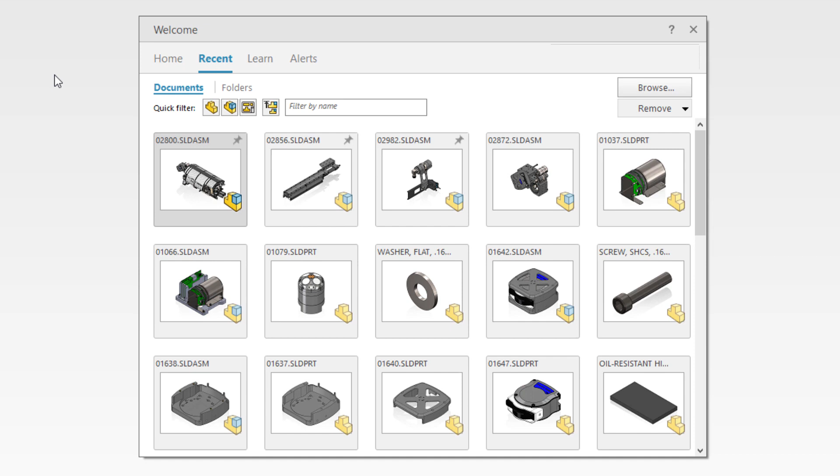You demand the best performing tools so you can work as efficiently as possible. SOLIDWORKS 2021 delivers multiple new enhancements to access your data faster and work more efficiently. Open times for both resolved and lightweight assemblies have been improved in SOLIDWORKS 2021.

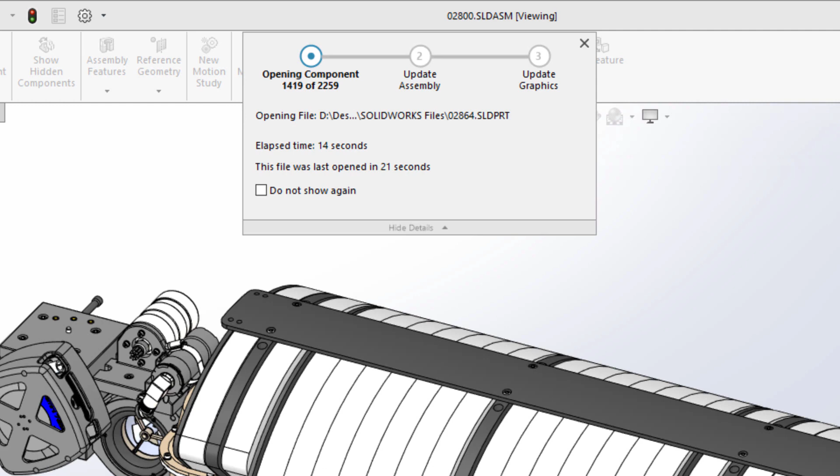This 2259 component assembly opens in only 21 seconds, making getting into your designs faster than ever. The larger the assembly, the greater the gains you will see while opening them in lightweight mode.

To improve working with lightweight components, there is now also a more streamlined approach to accessing their assembly and feature information. Simply expanding a component from the Feature Manager tree will now dynamically load those components on demand, giving you access to the fully resolved subassembly or part.

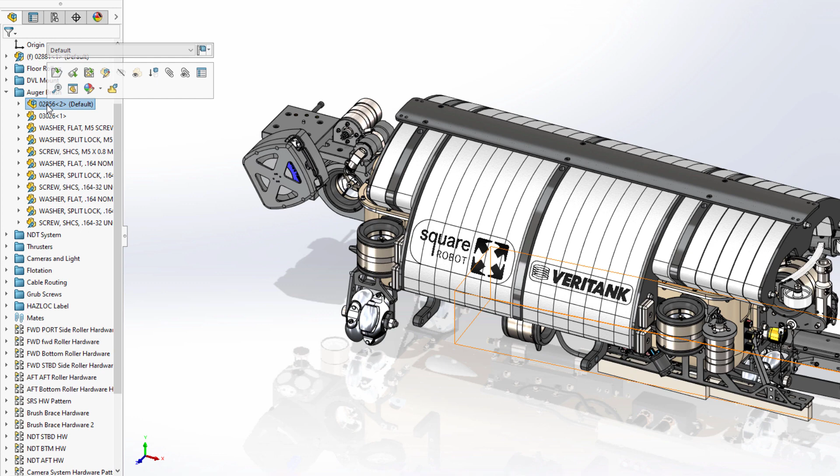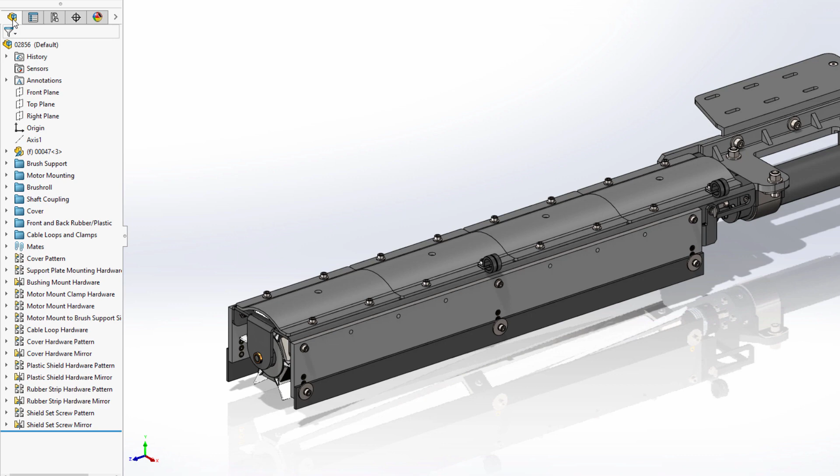This prevents unnecessary loading of large assemblies, but also allows you to quickly access and resolve the components you're working on as needed. Working with configurations in SOLIDWORKS 2021 is now also faster. Both switching between and creating new configurations are now significantly faster for assemblies.

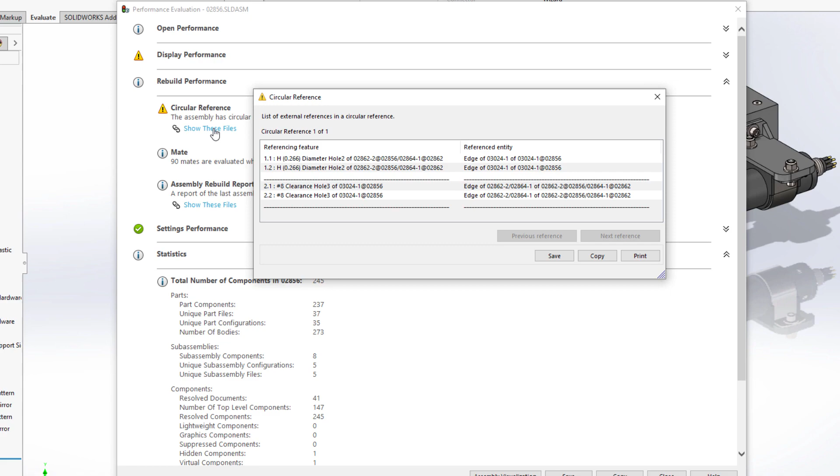The performance evaluation tool within SOLIDWORKS has always been an invaluable resource to give insight into areas of a design that may cause performance degradation. New for SOLIDWORKS 2021 is the analysis and reporting of circular references within an assembly. In this case, two holes on two separate parts have been found to reference one another.

You can use this information to further investigate the design and determine how they're referencing one another to fix these issues. In this scenario, one of the components listed in the report contains a hole wizard feature, where its location sketch has center points that are referencing the edges of a hole in the adjacent part to locate them concentrically.

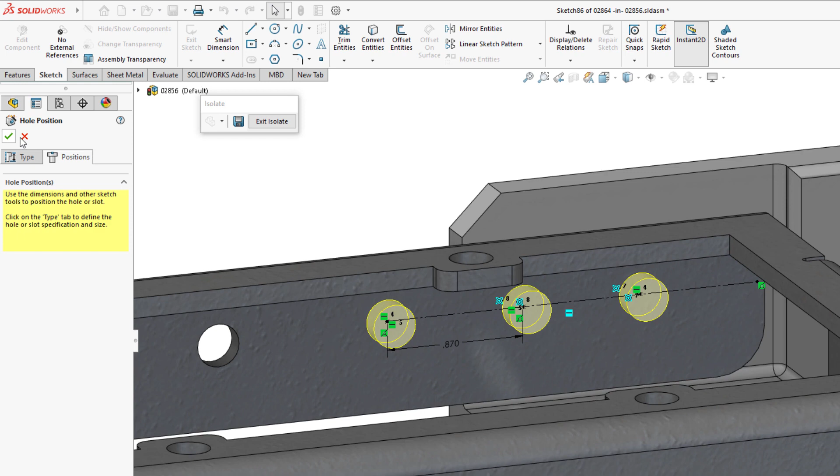This is a common top-down design practice to ensure that holes always remain aligned to one another. However, on investigation of the second component's feature, also a hole wizard, it appears that the center points within this sketch are likewise referencing the edges of the previously interrogated holes. This creates a circumstance where both features are trying to define the location of each other, or a circular reference.

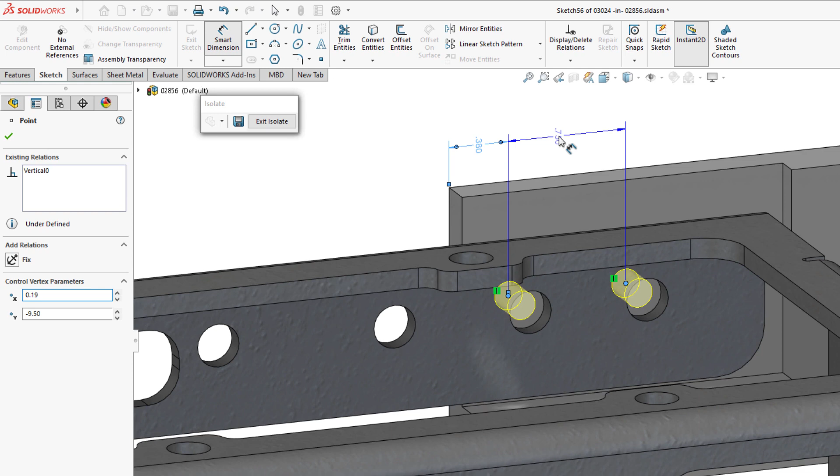To fix this scenario, the best course of action would be to remove the external references and redefine the location of the hole centers in one of the sketches, in this case dimensionally to the part they reside within. Once the changes have been made, a quick rebuild removes any warnings from the assembly.

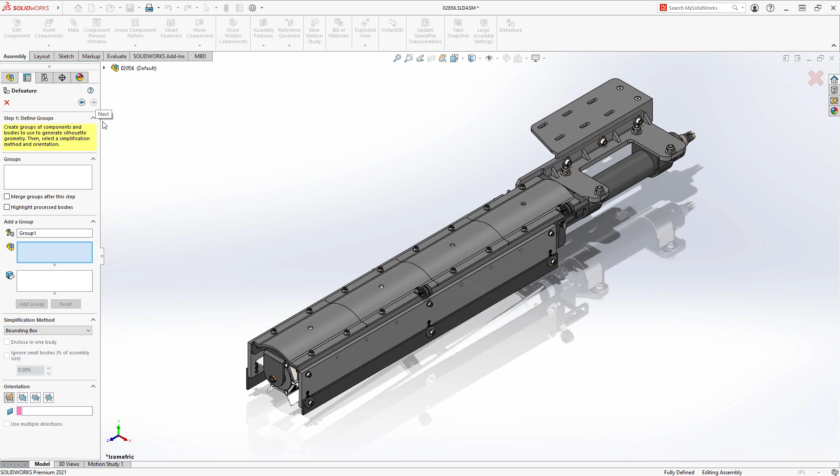Finally, you can use Silhouette Defeature, introduced in SOLIDWORKS 2019, on an assembly to create a simplified representation of it, or to protect proprietary information. Silhouette Defeature provides an intuitive step-by-step workflow to define this simplified version using a variety of geometry simplification tools.

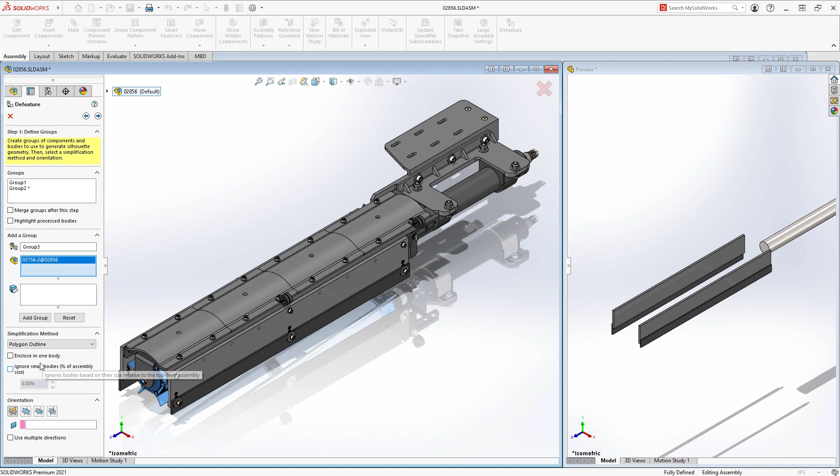While you are selecting the components, bodies, or subassemblies you want to simplify, you will always have a side-by-side view to show what your finished representation will look like. This ensures that you can capture the correct amount of detail. The methods you can use to simplify your geometry range from something as simple as a bounding box or cylindrical representation of the components, or something a little more complex, like the polygon or tight fit methods, which add a little bit more detail to the final results.

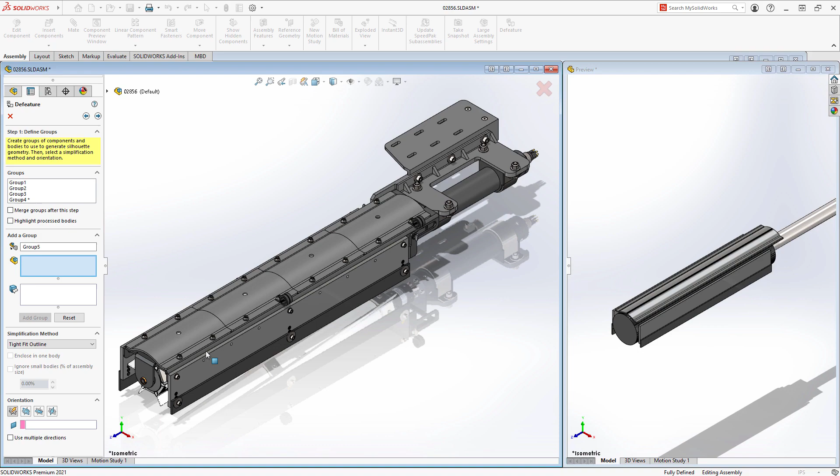Perhaps some of the components in your subassembly are critical to show in a top-level design, even within a simplified representation. For those instances, you can choose the copy geometry method to capture all of the detail of those components, bodies, or subassemblies.

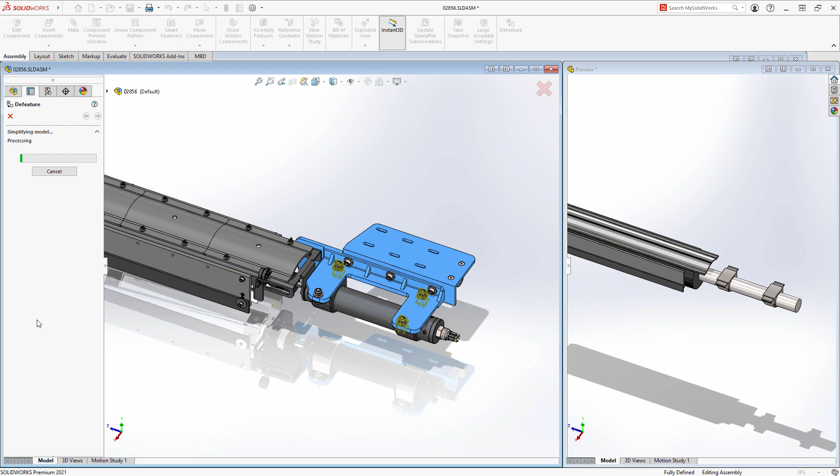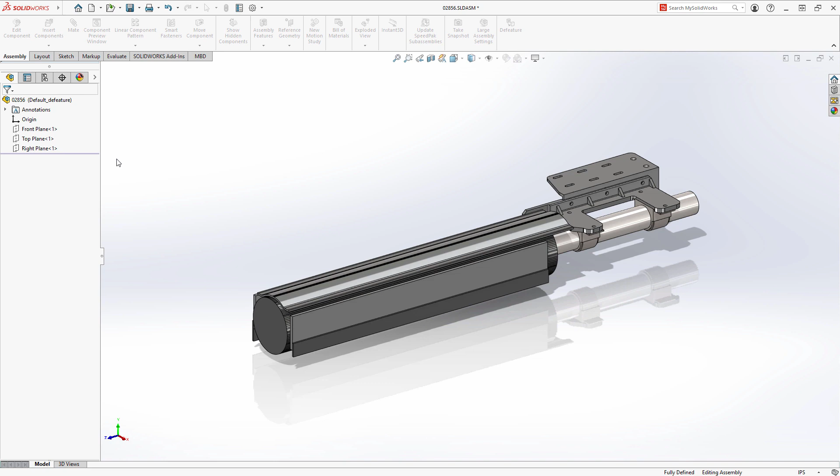What's new for Silhouette Defeature in SOLIDWORKS 2021 is the ability to save this simplified representation as a configuration within the same assembly from which it was created. This eliminates the need to manage a separate file that contains the simplified model. You may still want to use those other methods when using Silhouette Defeature to remove proprietary information from a design to share outside of your organization as a separate disconnected file.

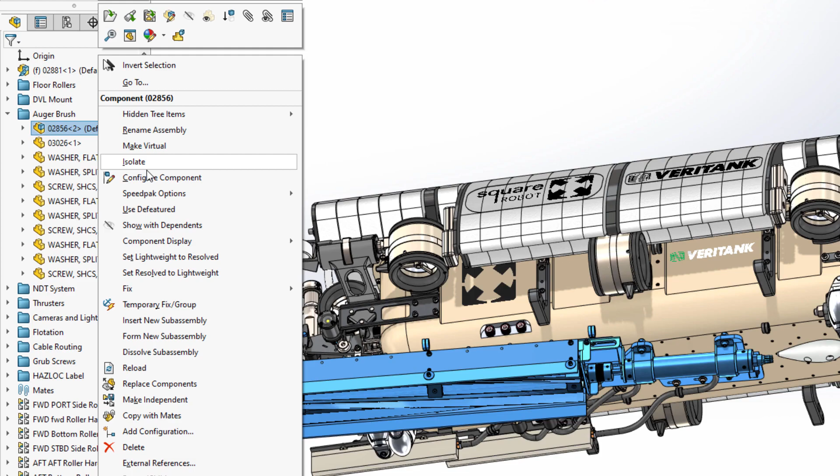However, when using defeatured models within higher level assemblies, it is now as simple as right-clicking on the component and choosing to use the defeatured version. Defeatured assemblies as configurations provide a way to both simplify complex assemblies visually and also add a performance boost in cases where the detail of the individual components isn't necessary. With these new performance-oriented features in SOLIDWORKS 2021, you will be able to work faster and more efficiently with larger and more complex designs.